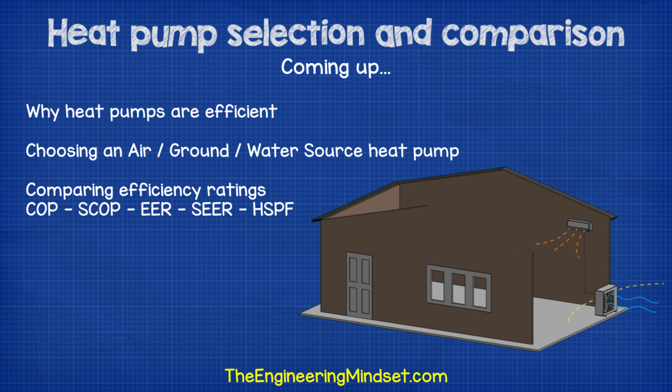In this video, we're going to be discussing heat pumps and comparing the different options available. Coming up: why heat pumps are efficient, choosing an air, ground or water source heat pump, and comparing efficiency ratings such as COP, SCOP, EER, SEER and HSPF.

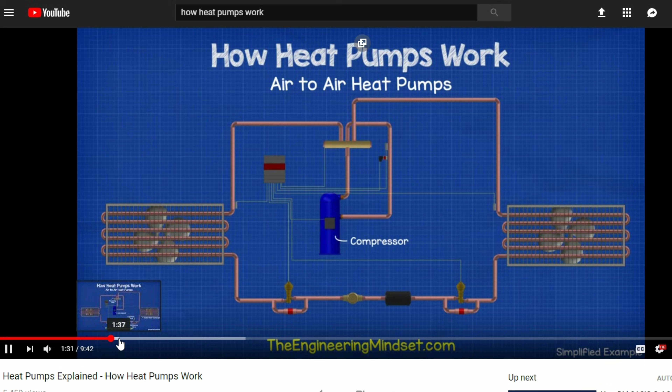Now, in the last video, we looked at the different types of heat pumps and how each type worked. In this video, we're going to be looking at how to select one and how to compare the different types of heat pumps. Why are heat pumps efficient?

If we look at conventional heating methods, a gas boiler or furnace has an efficiency of say 85%, so to provide 10,000 kilowatt hours of heating over a heating season, we need to input 11,765 kilowatt hours of energy from gas. That's because we need to combust fuel and then try to capture any heat it produces before it leaves and enters the flue.

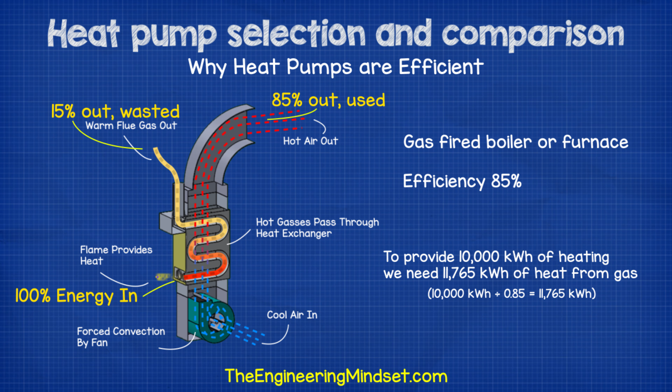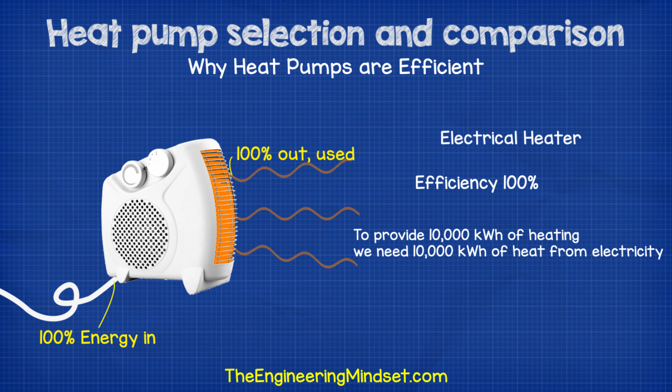Inevitably, we cannot capture all of it, so some of it will go to waste. An electrical heater is 100% efficient, so to provide 10,000 kilowatt hours of heating, we need 10,000 kilowatt hours of electricity. For this, we're turning electricity directly into heat through resistance. We can't get more heat out than the energy we put in, so we can only get 10,000 kilowatt hours out.

An air source heat pump is maybe 400% efficient in comparison, i.e. it has a COP of 4. We'll see what that means later on in this video. So to provide 10,000 kilowatt hours of heating, we need to input 2,500 kilowatt hours of electricity.

Sounds pretty magical, right? Well, there's no such thing as magic. What that means is we will use 1 kilowatt hour of electricity to capture 3 kilowatt hours of heat from the outside ambient air, and this will produce the 4 kilowatt hours of heating.

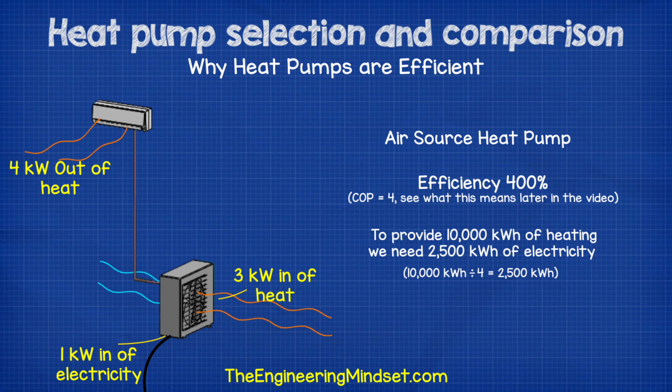The electricity is used by the compressor to send refrigerant around the system and capture the heat from outside, then bring it inside. It can do this because the refrigerant has an extremely low boiling point. For example, water boils at around 100 degrees Celsius or 212 degrees Fahrenheit, and as it boils, it carries heat away as steam.

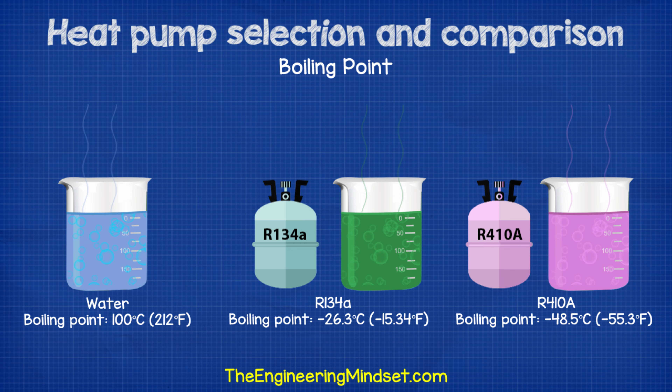Refrigerants have a much lower boiling point. For example, R134A boils at minus 26.3 degrees Celsius, and R410A boils at minus 48.5 degrees Celsius. So even when the outside air is very cold, we can still capture enough energy to cause the refrigerant to boil, and as it boils, it carries this thermal energy away and into the building.

Obviously, the warmer the outside air is, then the more thermal energy there is to capture. As the outside air temperature drops, it will reach a certain point where it becomes uneconomical for the cost of electricity consumption to capture the thermal energy.

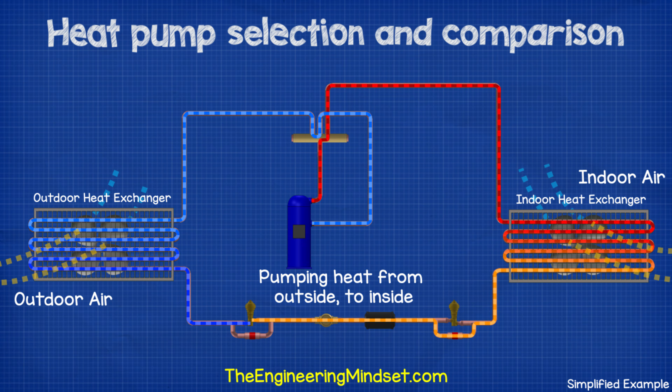So which heat pump should we get? Well, first we need to decide if we want to provide hot water or hot air to the property. If air, then do we also want to provide cooling during the summer? Do we have access to a lake or river? If not, then we can't use a water source heat pump. Will the heat pump be installed into a new or existing property?

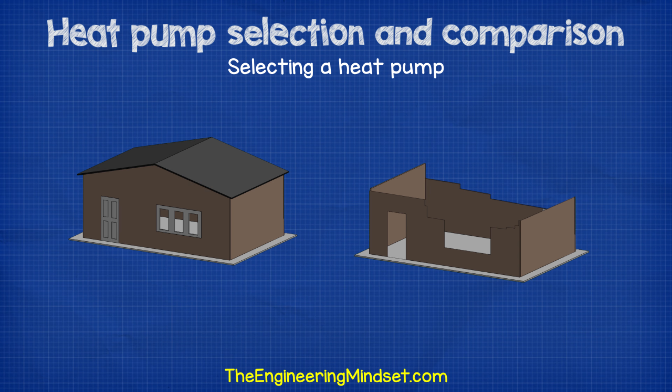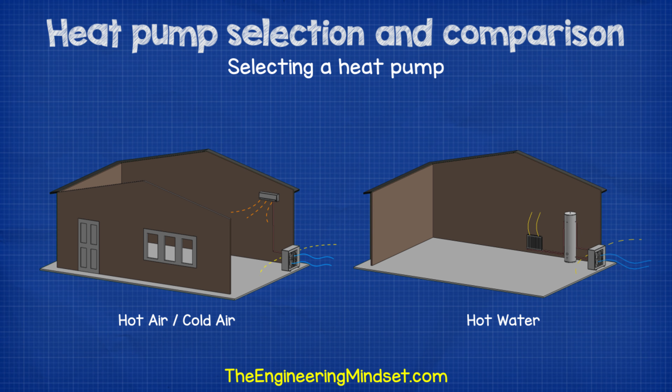If it's existing, then we probably also need to install larger radiators or underfloor heating to maximize the heat, as it is a lower temperature than conventional boilers. We also need to consider our budget, as the cost can really vary by the type. Finally, we can then decide if an air source, ground source or water source heat pump is best for us.

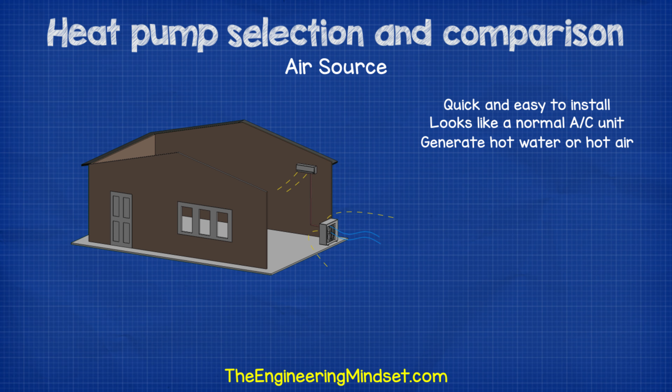Air source is the quickest and easiest to install, and it looks like a normal air conditioning unit. You can use these units to generate hot water or hot air. Some units also incorporate a reversing valve to operate in a cooling mode also. We've covered how reversing valves work in our previous video, do check that out, links are in the video description below.

The units are installed outside, and keep in mind that it will create some noise from the fans and the compressors. They need access to ambient air, so don't box them in, else this will cause recirculation and you'll be trying to extract energy from the air that you've just extracted energy from. This is obviously not very efficient and it's going to waste a lot of electricity.

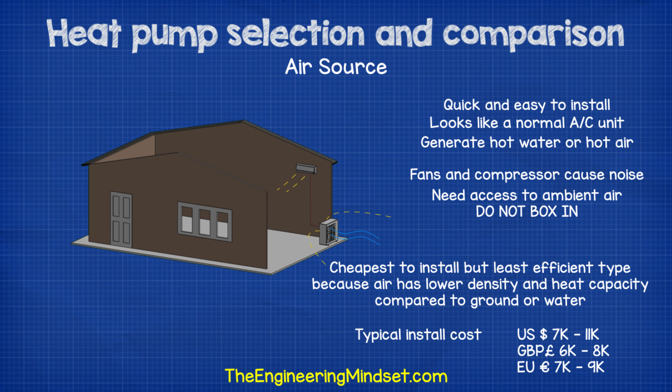Now these units are the cheapest to install, but they're typically the least efficient because air has a low density and heat capacity compared to soil or water. Approximate cost to install an air source heat pump system is something in the range of $7,000 to $11,000, £6,000 to £8,000, or €7,000 to €9,000. This is going to dramatically vary depending on the location, complexity and size.

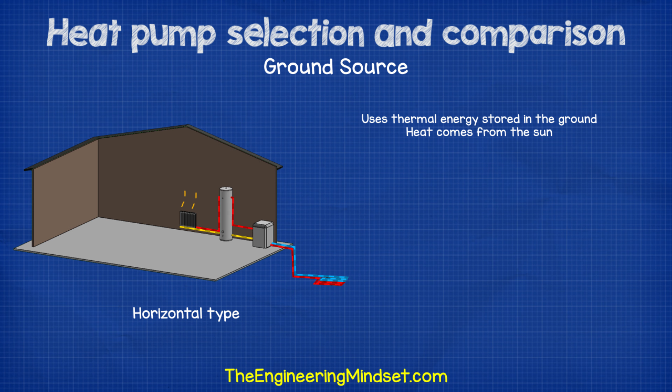Ground source is the second most popular option. It's more commonly used for hot water production, but you can get units and systems that can reverse to provide cooling. It uses thermal energy embedded within the ground, where it comes from the sun. This option is typically more efficient than air source because the ground has a higher density and heat capacity compared to air. This option requires extensive excavation, however, so it's best suited to new builds and can be incorporated within the construction to reduce costs.

The horizontal type uses pipes buried in the ground at 1 to 2 meters, or 3 to 6 feet. You'll typically be able to extract around 10 to 30 watts per meter of pipe, depending on the ground type. Install costs are typically somewhere around $13,000 to $24,000, 10 to 18,000 pounds, or 12 to 20,000 euros, but this will dramatically vary on location, complexity and size.

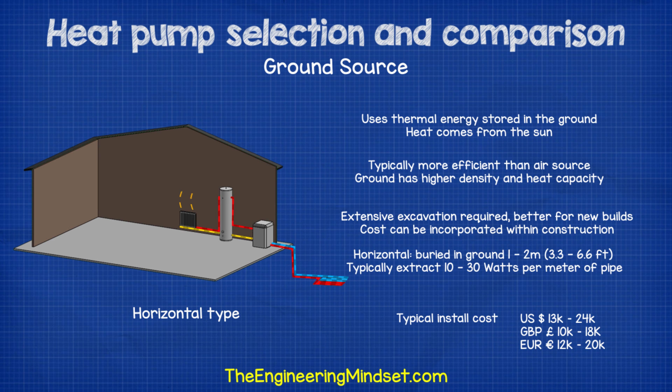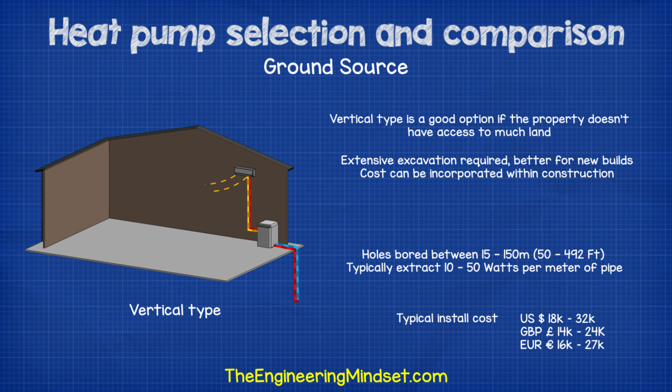If you don't have access to a lot of land, then we also have the vertical type, which uses a loop of pipe placed deep in vertical holes. The holes are typically somewhere between 15 and 150 meters deep, or 50 and 492 feet, and you can typically extract 10 to 50 watts per meter, depending on the ground type and the water content. Installation costs are typically $18,000 to $32,000, 14 to 24,000 pounds, or 16 to 27,000 euros. Again, this dramatically varies depending on location, complexity and size.

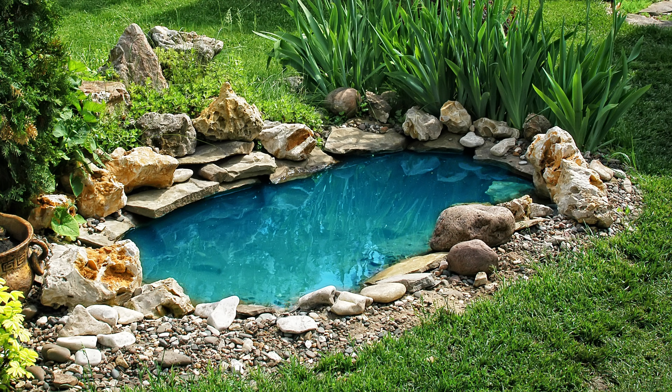Water source: the third option we have is the water source heat pump. This is the least common type simply because the property needs to have access to a lake or river. Unfortunately, that little garden pond just isn't going to be big enough. For this type, there are two options, either open or closed loop.

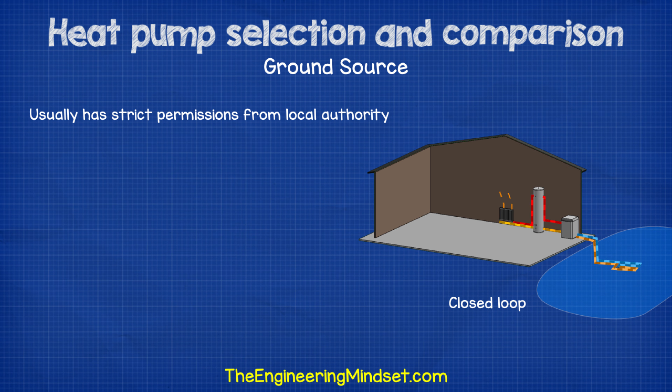Closed loop uses a water plus antifreeze mixture to cycle around and capture the heat. Alternatively, we have an open type which pulls in water from the source, extracts the energy, and then releases this water back into the source some distance away. This type usually has much stricter permissions required from the local authority. Consider that if the system leaks and the refrigerant or antifreeze mixture gets into the water source, it's going to be toxic for the wildlife and you might even receive a fine from the Environmental Protection Agency. It's pretty rare for it to leak though, but it has happened.

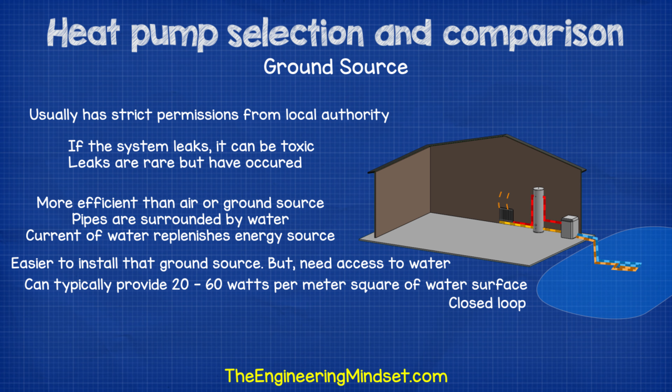However, this option is very efficient, more so than air or ground source. The pipes are constantly surrounded by water, and the current and flow of water means that the energy source is constantly replenished. It's also fairly easy to install and much cheaper to install than ground source. Typically, a water source unit can provide around 20 to 60 watts per square meter of water surface. Cost to install is typically around 10 to 15,000 US dollars, 8 to 12,000 pounds, and 9 to 14,000 euros, again dramatically varying with location, complexity and size.

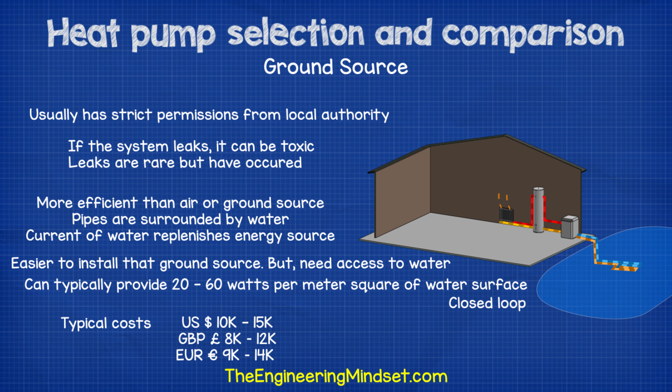Comparing different units and their efficiencies: there are many standards used across the world for assessing the efficiency of heat pumps. I'm going to just cover a few of the most common ones, focusing on units made in the US and the EU.

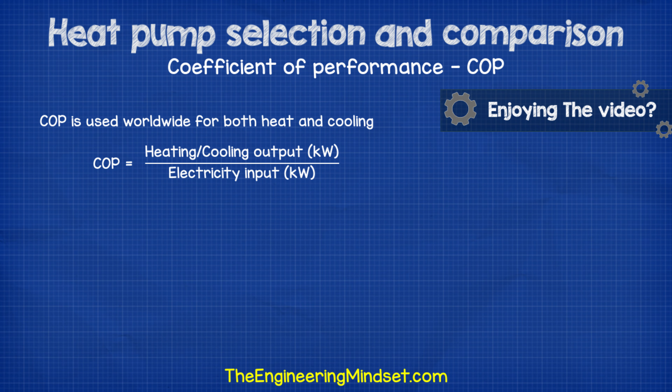COP values, or the coefficient of performance, is used worldwide for both heating and cooling. It's simply the heating or cooling output divided by the electricity input. It's not a good indicator of efficiency, however, because it only gives a snapshot of how a unit should perform under very precise conditions. For example, this unit has a heating COP of 2.9.

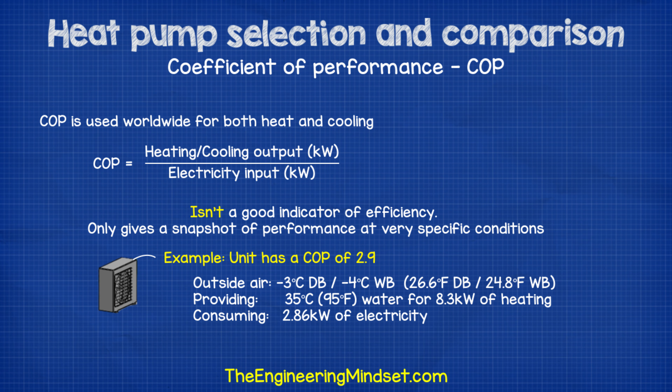But when you read the small print, that was achieved when the outside air was -3 degrees Celsius dry bulb and -4 degrees Celsius wet bulb, while providing 35 degrees Celsius water for 8.3 kilowatts of heating and consuming 2.86 kilowatts of electricity. As the outside air temperature varies hourly and daily, this is not a good indicator of efficiency.

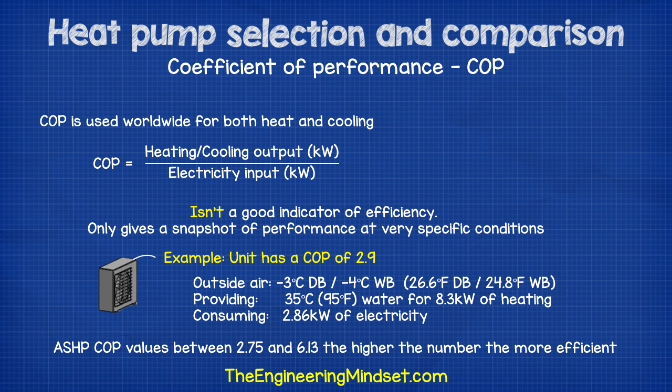We reviewed the manufacturer literature of many air source units and found them to vary between 2.75 and 6.13 COP.

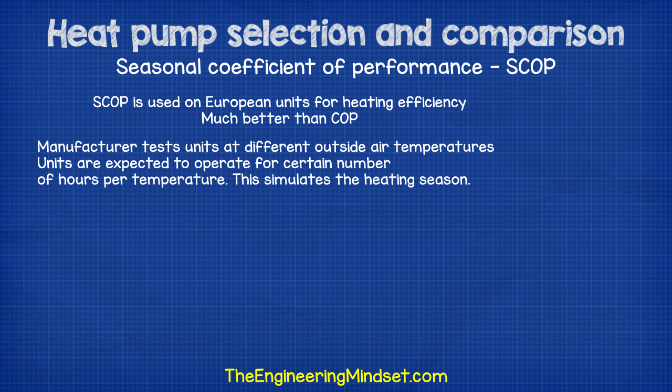You'll see this on European units to measure their average heating efficiency. It's a much better indicator than just the COP. The manufacturer has to test the performance of their units at different outside air temperatures. The unit is expected to operate at a specified number of hours at each temperature per year depending on where in Europe it's located. There are 3 zones: warm, average and cold. The heat supplied and electricity consumed for the specified operating hours at each temperature is accumulated and divided to give an average COP for the year.

The SCOP also considers the energy consumption for things such as standby mode and crankcase heating. You'll see stickers like this on EU-produced heat pumps, which lets the buyer quickly and easily see how the unit is predicted to perform depending on which climate they're in. We reviewed a number of air source units for our domestic purposes and found that the typical SCOP values lay between 3.9 and 5.2, with a higher number meaning more efficient.

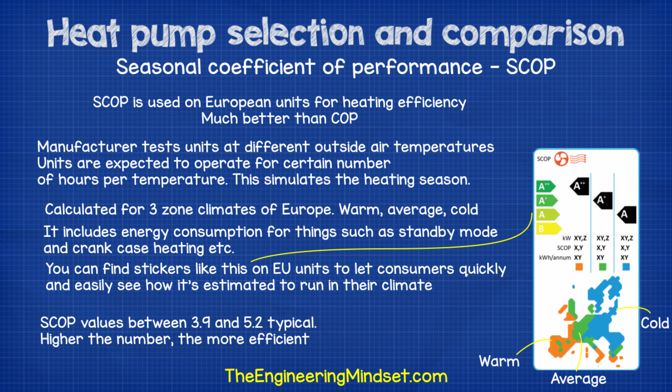EER, or Energy Efficiency Ratio. This is a measurement of a unit's cooling efficiency that's mostly used in the US. It's a ratio of a unit's cooling capacity in BTUs divided by the watts consumed to produce it.

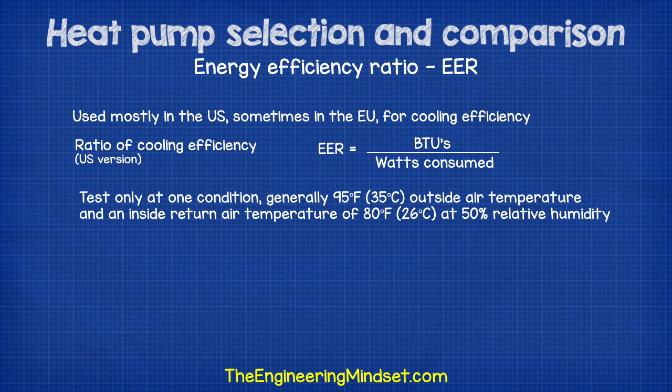This is only tested at one condition, generally 95 degrees Fahrenheit outside air temperature, and has a return inside air temperature of 80 degrees Fahrenheit at 50% relative humidity. So it's not recommended to use this to estimate your annual energy consumption or assess how the unit will perform in your location unless you live in a hot climate.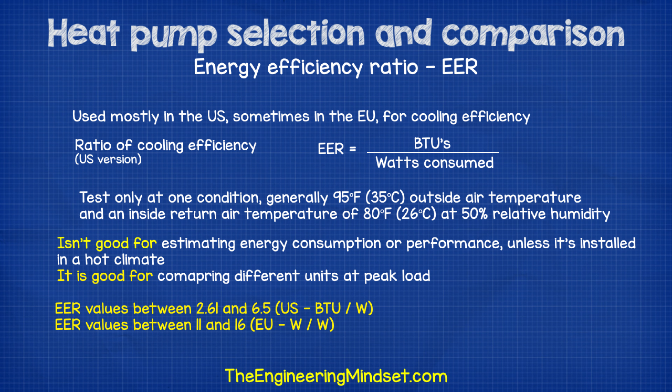However, it is a good way to compare units by different manufacturers for peak summer load. From the units we reviewed, we found units rated between 11 and 16, with the higher the number, the more efficient it is. The SEER, or Seasonal Energy Efficiency Ratio, is used in both the US and the EU on units which operate in cooling mode.

Manufacturers will calculate their unit's SEER value by testing it at a number of different outdoor temperatures to represent a cooling season. The units of measurement are different, with EU models calculated on watts of cooling per watts of electricity, and US models calculated on BTUs of cooling per watts of electricity used.

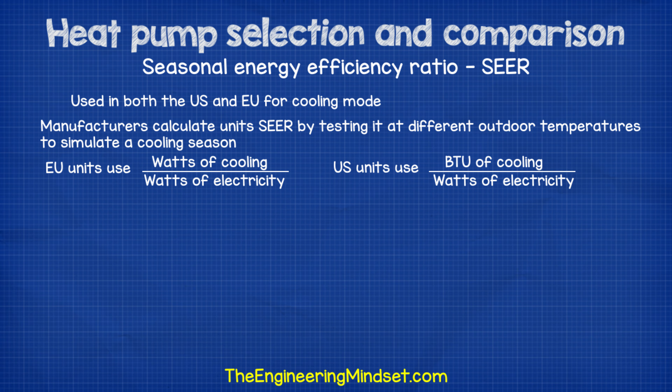In both cases, this is suitable for units installed in very average climates. If the unit is installed in a hotter or cooler part of the US or EU, then it will not accurately represent how the unit will perform. So it's a good way to compare different units, but not a good way to calculate the energy consumption unless you live in an area with pretty average weather conditions.

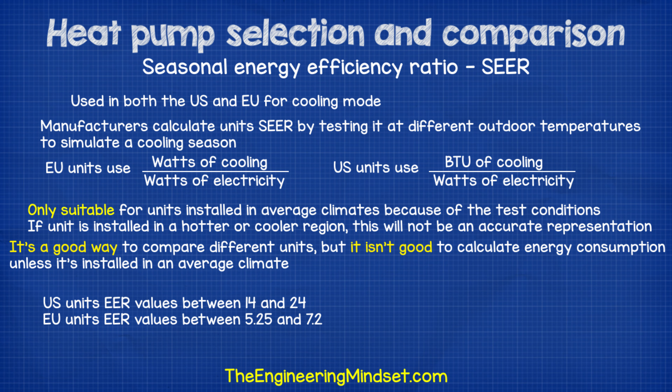Typically, you can find SEER values for US units between 14 and 24 and EU units between 5.25 and 7.2. The higher the number, the more efficient the unit is rated. HSPF, or Heating Seasonal Performance Factor.

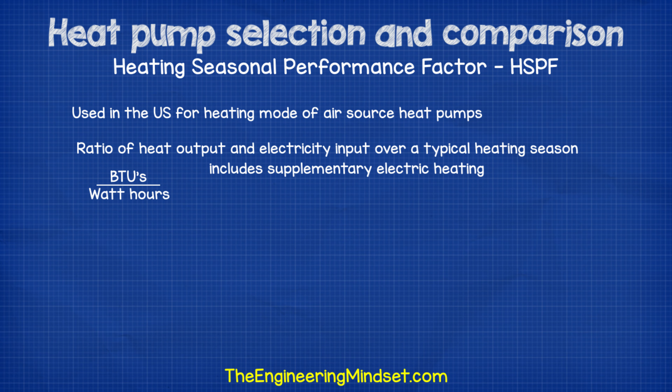This is used in the US for the heating mode of air source heat pumps. It is the ratio between heat output in BTUs over a heating season divided by how many watt hours of electricity were used to produce it. It also takes into account supplementary electric heating.

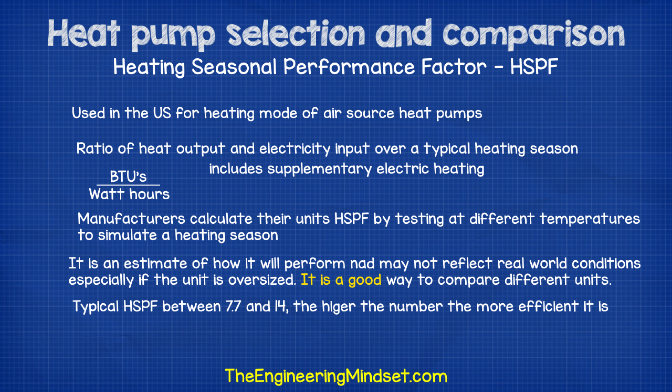Manufacturers calculate their unit's HSPF from testing it at defined different temperatures to represent a heating season. This is an estimate of how the unit will perform, and it may not actually perform like this in reality, especially if the unit is oversized. It is a good way though to compare different units. Typically, a unit will be between 7.7 and 14, with the higher the number, the more efficient the unit is rated.